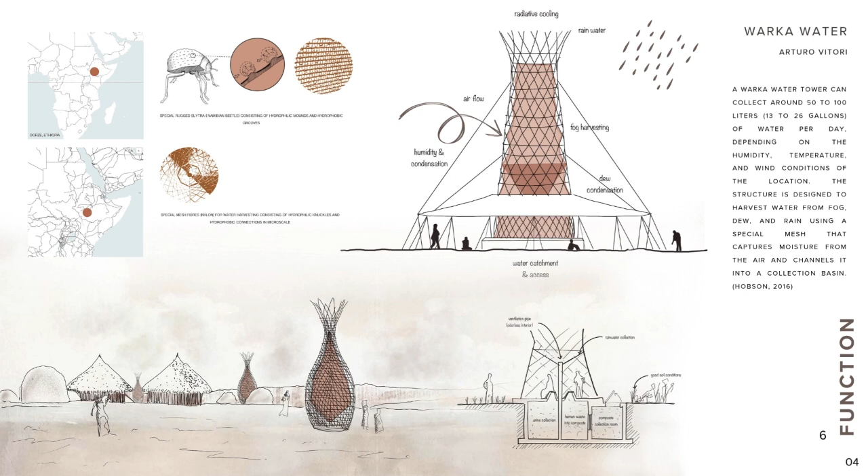So let's take a look at the precedents. The first precedent takes place in Dorze, Ethiopia, called Warka Towers. This is inspired by the fog beetle shell, which mimics its hydrophilic and hydrophobic properties to efficiently capture and store water from the air, offering a sustainable solution for water scarcity in arid regions.

The second precedent takes place in the south of Iran. Concave roof structures serve as a very powerful precedent, coalescing raindrops and standing as a constant visual reminder of water harvesting through their prominent designs.

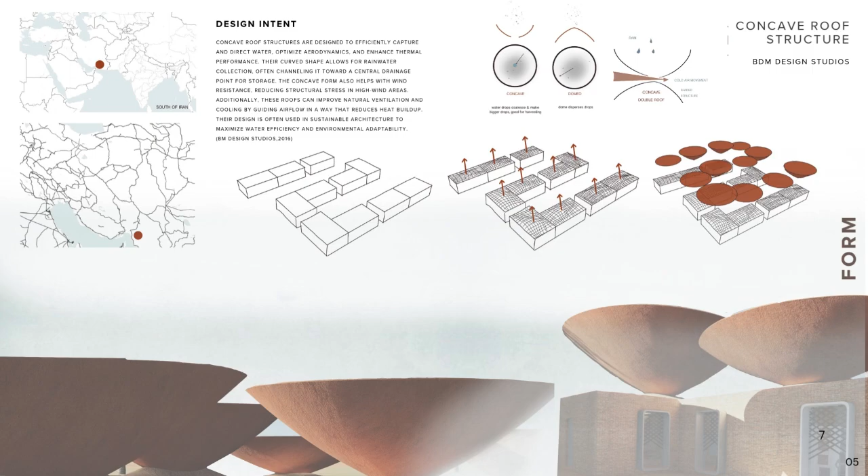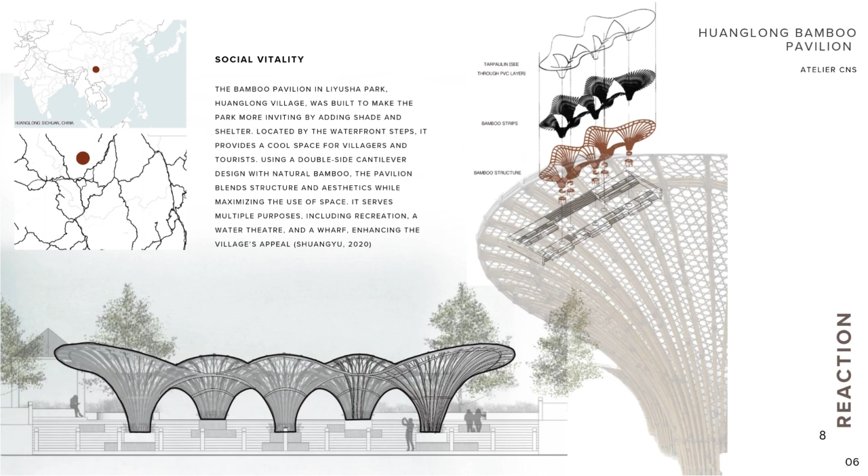And the last precedent, called the Bamboo Pavilion in China, revitalized the waterfront space with its striking structure, fostering social vitality and drawing people in through its unique and inviting design. These three precedents highlight the integration of sustainable water harvesting through innovative design, the visual impact of water conservation, and the power of architecture to foster social vitality and human connection to the environment.

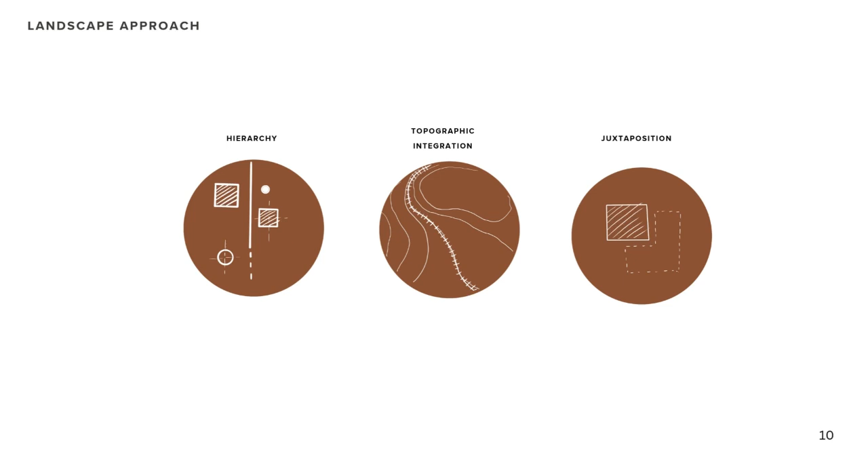Landscape approaches: my landscape is informed by three main strategies. Hierarchy—this shapes pathways through scale, program, and the emotions they evoke. Next is topographic integration, addressing infill and cutout to blend with the terrain. And lastly, juxtaposition, exploring contrast not only in materials but also between humid and arid conditions.

The pathways are divided into a hierarchy. Primary paths are informed by axial linkage. They transect the site, unifying it with adjacent spaces and existing zoo pathways. The curved design of the roads blends seamlessly with the site's topography and existing paths.

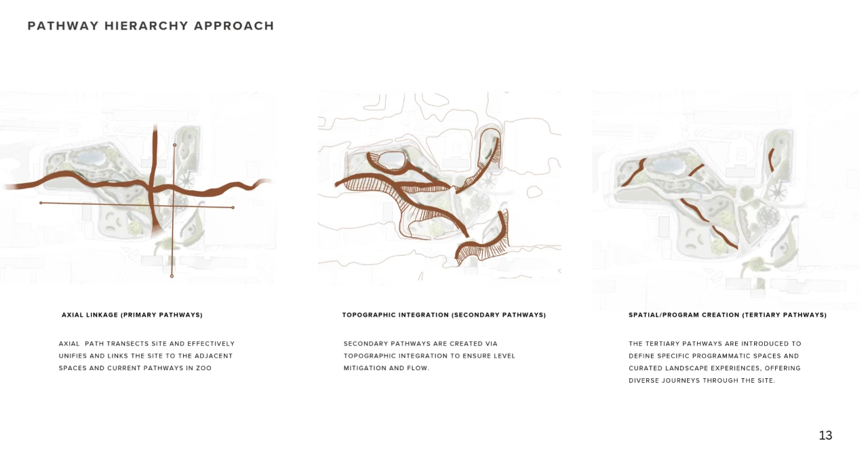Topographic integration harmonizes with the landform. Lastly, tertiary paths divide spaces to define and support the program. Here is a collective depiction of all paths and programs.

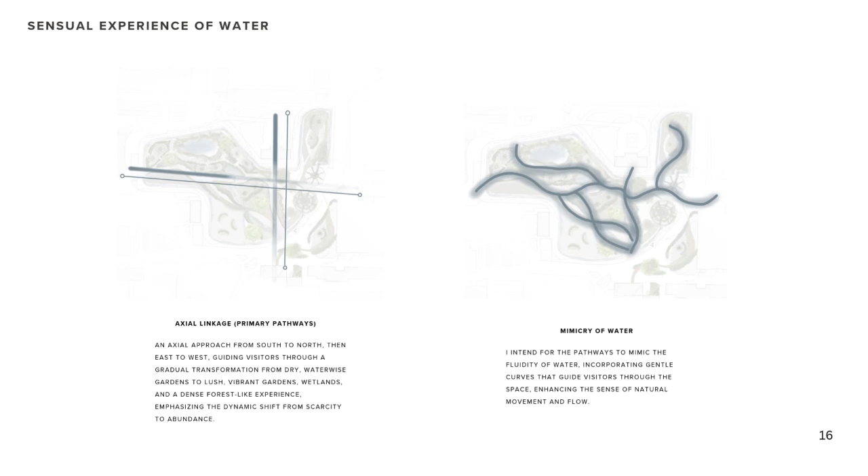Next, we'll look at how water also informed the layout of the landscape. The pathways follow an axial route from south to north and east to west, guiding visitors through a transition from dry gardens to lush, vibrant landscapes, symbolizing the shift from scarcity to abundance. Gentle curves also mimic water's fluidity, enhancing the natural environment through the space.

I intended to create a constructed wetland. The largest benefit of a wetland is its role in enhancing biodiversity and water management. This was also a topographical choice, as the wetland occupies the site's lowest point, historically also serving as the elephant's water hole, making it a natural and fitting location for this feature.

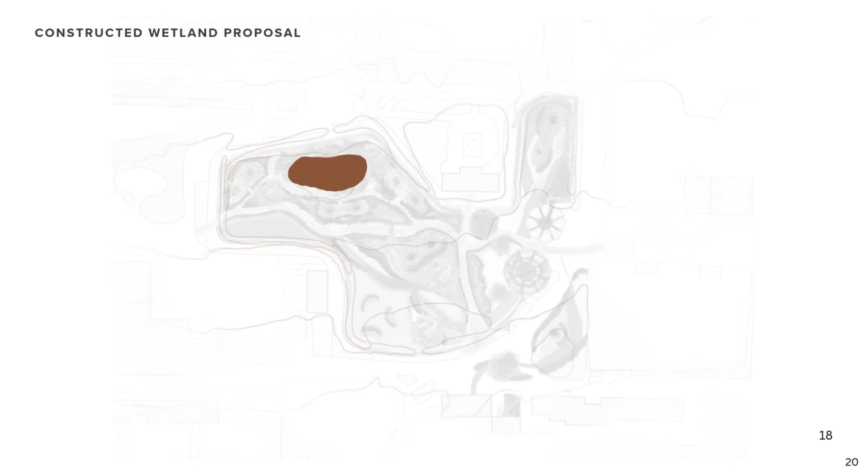I've selected 6 main plants for the wetland. They all share key characteristics in their ability to support diverse wildlife. These plants provide crucial habitat and nourishment for a range of animals, including birds, insects, and small mammals, by offering food sources like seeds and nectar, as well as shelter. Their presence enhances the wetland ecosystem, attracting species that thrive in these rich biodiverse environments, furthering the site's ecological vitality.

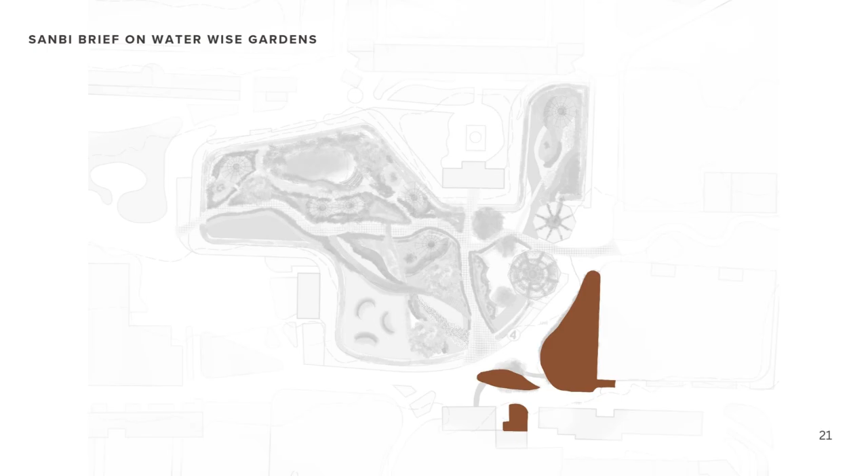The 3 water-wise gardens were designed with low-maintenance plants like aloes and succulents, chosen for their resilience and ability to attract wildlife. The ground will be covered in pebbles to further reduce water usage and maintenance. These gardens are then rated out of 5 based on their height and sun exposure, with calculations provided to guide plant selection.

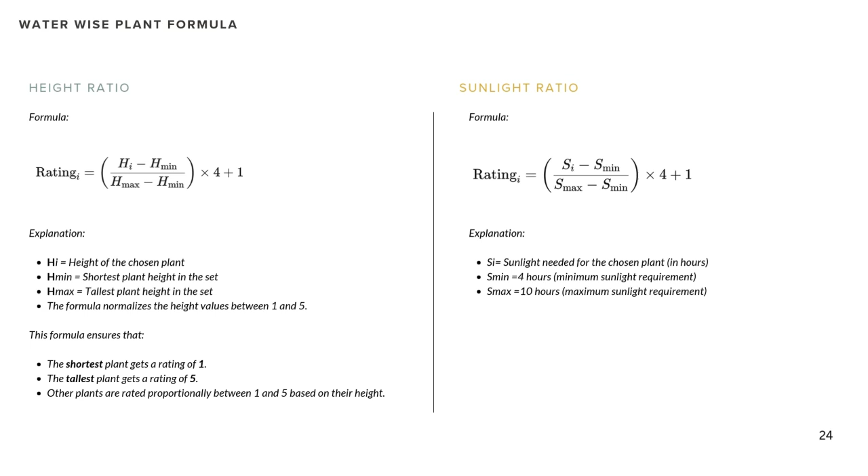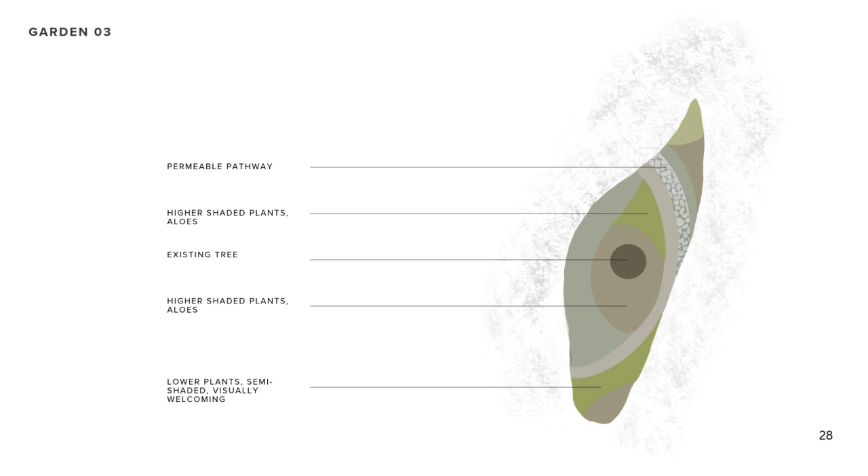Higher plants are placed towards the back of the gardens to create depth and allow unobstructed views for the shorter plants in the foreground. A shadow study was conducted to ensure optimal placement, and the layout correlates with the main site design, ensuring each garden's placement complements the overall structure and enhances ecological flow.

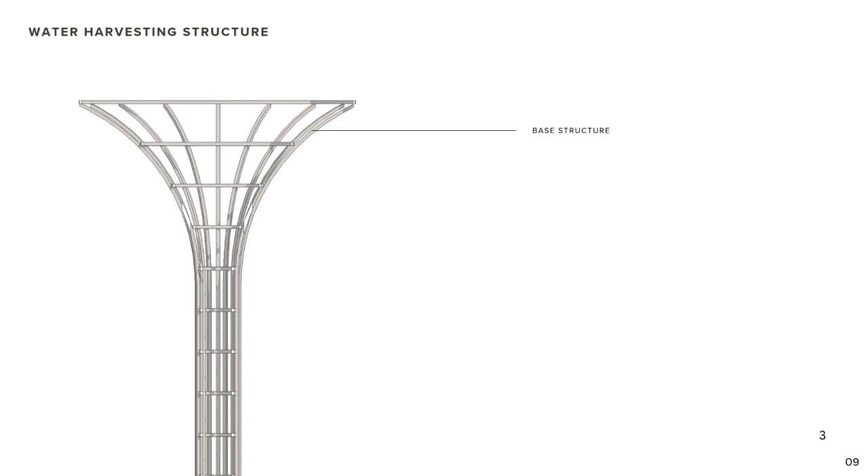The water catchment structure is designed to draw inspiration from precedents, serving both as functional water collectors and subconscious reminders of the importance of water. The base structure, designed for visual appeal, will allow the application of specific parametric designs, which we will see later.

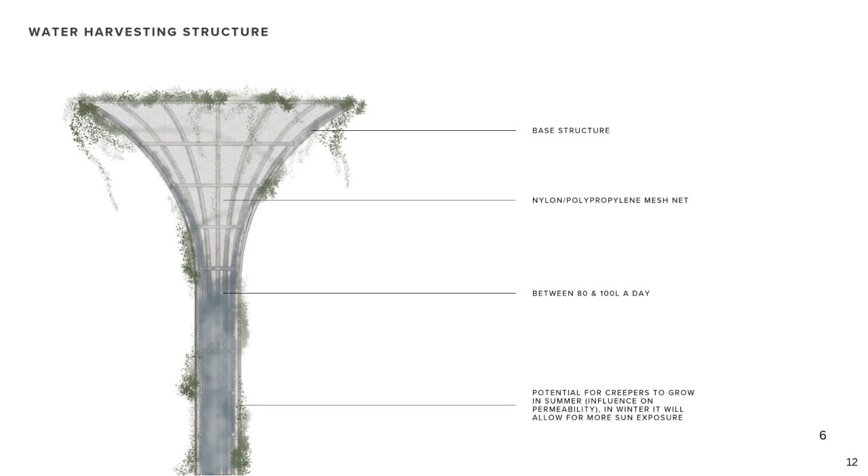Nylon mesh nets will be added to the structures near the wetlands, providing support for creepers to grow, which will attract biodiversity. This design responds dynamically to the seasons, with plants degrading in winter to allow more sunlight. As seen in previous precedents, the structure will have a positive social impact, drawing people in with its interactive and evolving nature.

These parametric designs are inspired by various elements, including the forms of leaves and flowers, African drum rope patterns, and woven baskets, creating a unique blend of nature and cultural references.

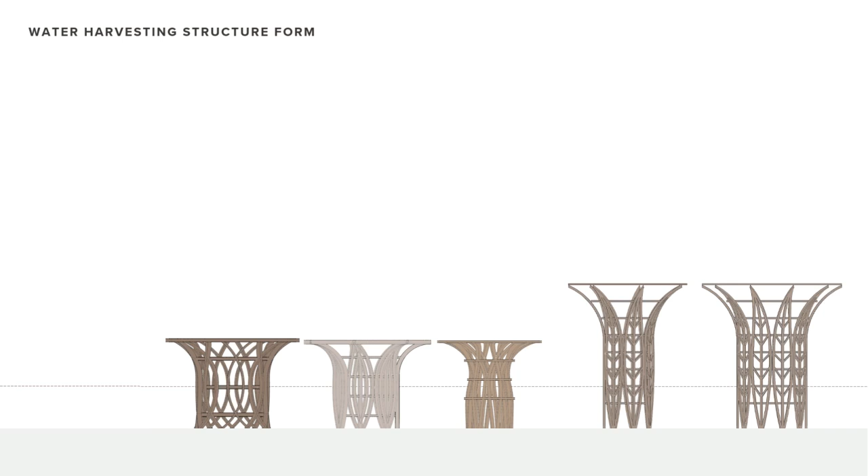All elements of the design maintain a concave form to maximize water collection, channeling rainfall into the structure's center and ensuring efficient retention and flow, while reinforcing the visual and functional relationship to water conservation.

The placement of these structures is strategically aligned with the wetlands, where increased water vapor and airborne moisture enhance their ability to collect the maximum amount of water particles on site. These structures will have nylon mesh to capture as much dew and air vapor as possible.

A higher density of structures is placed in this area, marking the lowest point on site, which helps significantly to reduce water runoff and flooding by capturing and managing excess water.

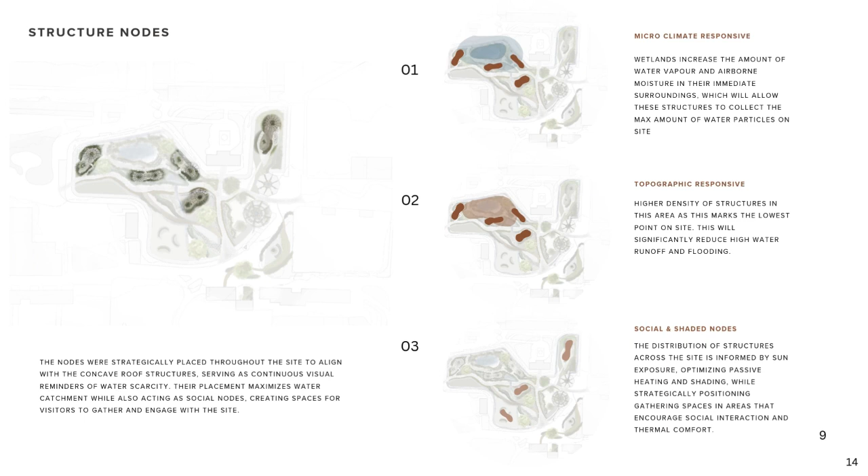This distribution of structures is guided by sun exposure, optimizing passive heating and shading, while placing social nodes in areas that promote interaction with thermal comfort.

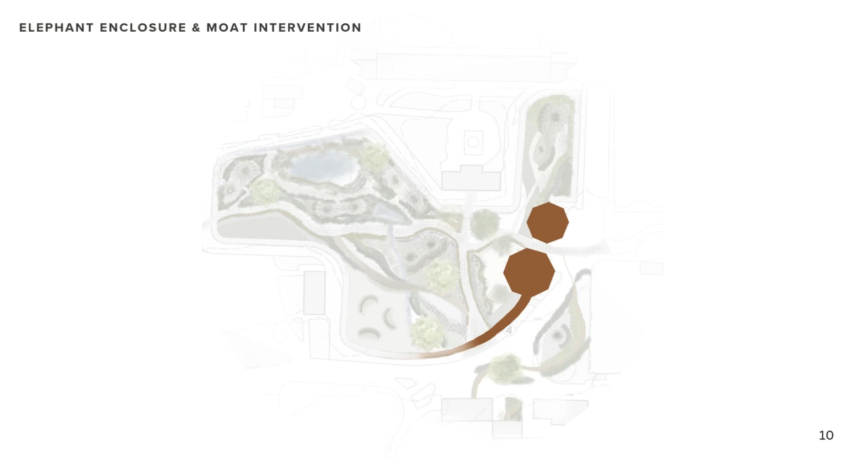Water collected will be channeled above ground as visual reminders and underground into French draining systems, which filter and purify water before directing it to the wetlands or repurposing it for irrigation. This integrated approach promotes sustainable water management while educating users on the critical value of water in maintaining environmental balance.

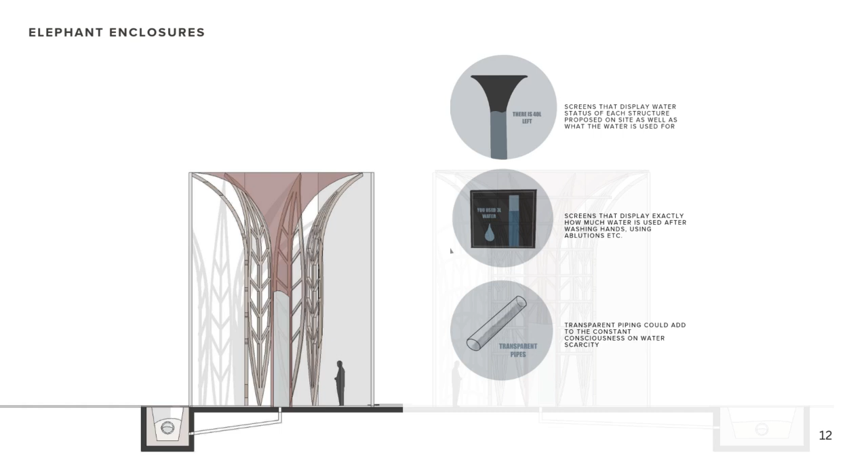Screens will display the water status of each structure, showing usage details such as hand washing and ablution consumption, while transparent piping enhances awareness of water scarcity.

The structures, including the elephant enclosures, bioswale, French drain, and wetland, will collectively capture approximately 338,000 litres of water per year, water that was previously not captured.

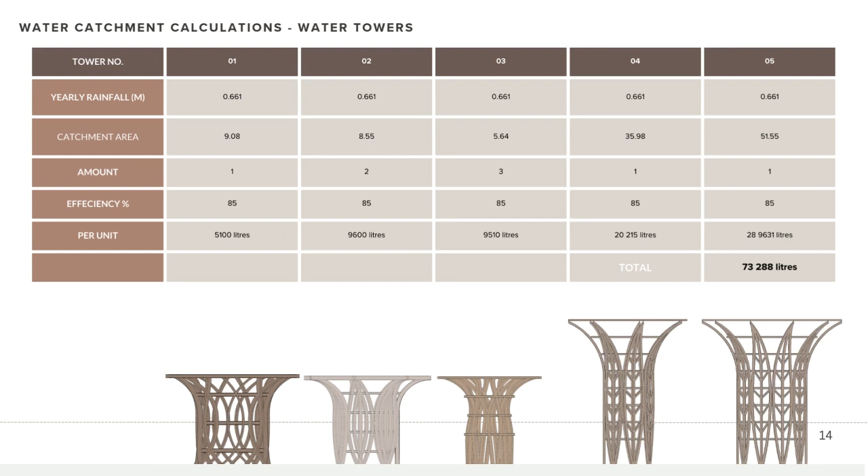To put this into perspective, this amount could irrigate around 135,000 square meters of garden, or provide approximately 338,000 hand washings. Additionally, it could flush a toilet about 42,000 times.

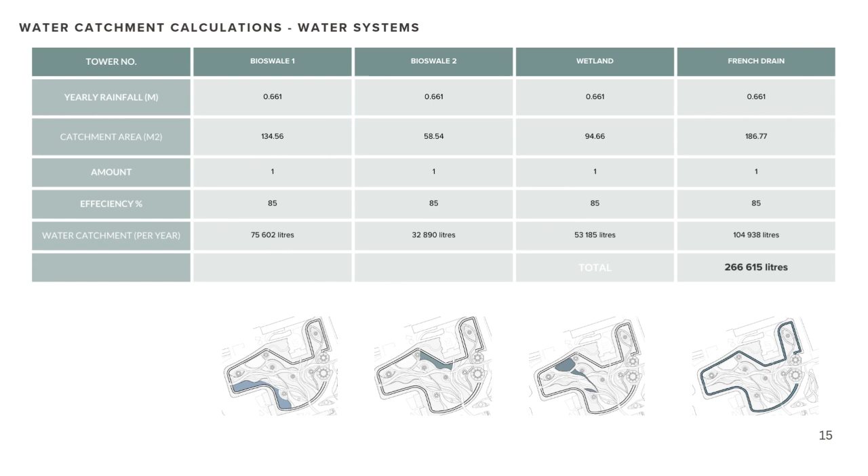The water collection plan illustrates the various proposed water systems on site, including the primary harvesting structures, bioswale, French drain, and wetland, highlighting how each system can contribute to efficient water capture and management.

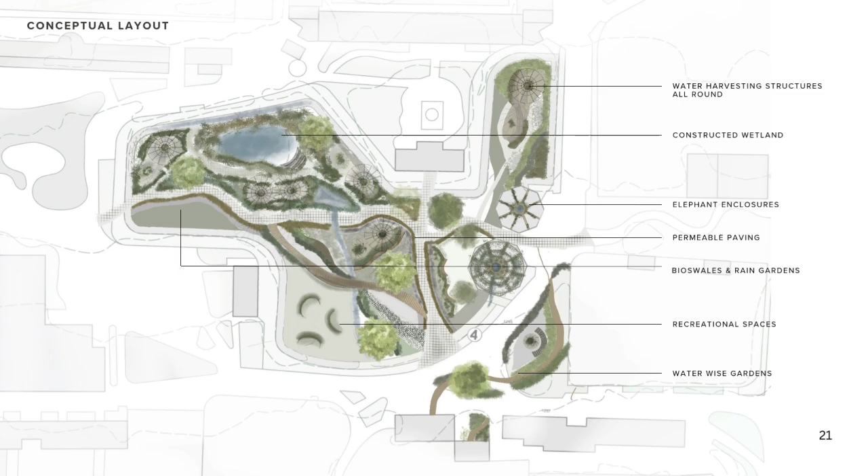Lastly, this is the final concept: integrating pathway approaches, sensory experiences of water, and structural catchment strategies into one cohesive concept, and thereafter, the final plan.

By seamlessly blending architecture, landscape, and water systems, my design not only creates a visually and sensory stimulating journey, but also embeds a deep, lasting connection to the critical importance of water conservation.

Through this immersive experience, visitors are not only educated, but also inspired to take action, fostering a collective sense of responsibility for preserving our most vital resource.

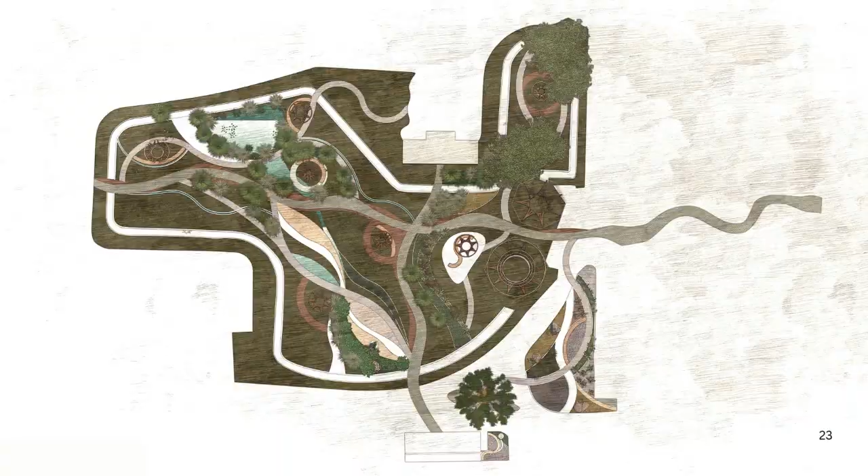As they move through the space, the stark contrast between scarcity and abundance serves as a powerful reminder of the impact our choices can have on the environment, ultimately driving a shift towards more sustainable, water-conscious living.

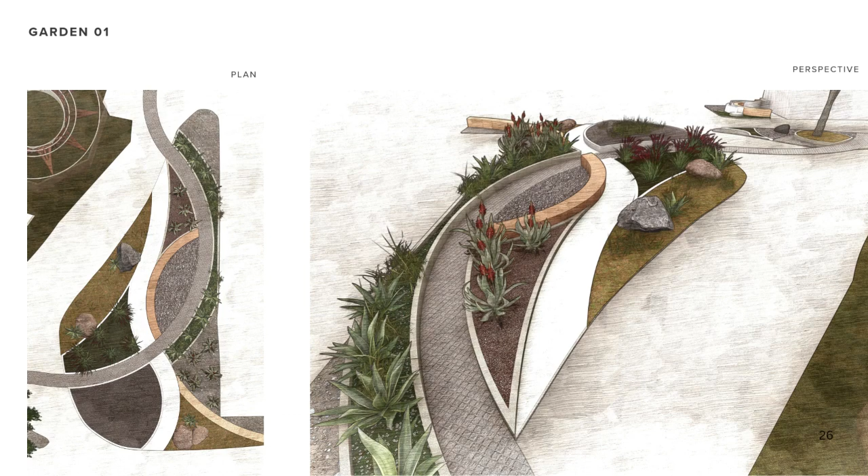Looking at the final perspectives, one can see that the experience begins with tactile sensations of cracked earth underfoot, the oppressive dryness of the air, and the palpable tension of scarcity.

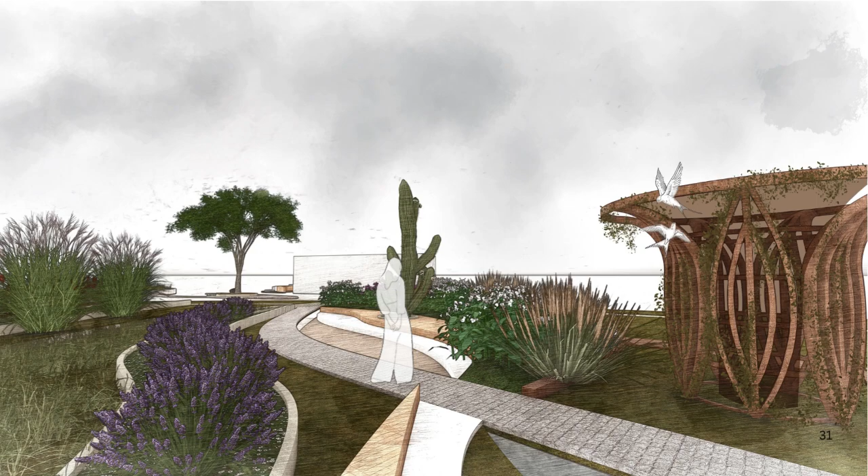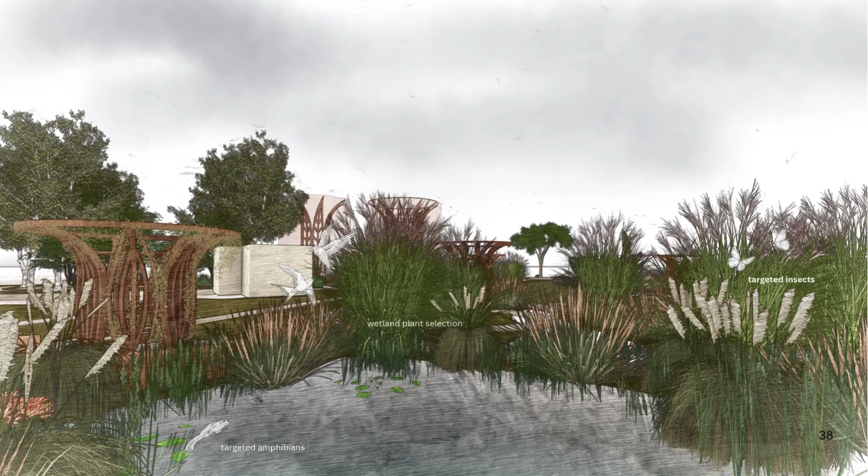As visitors progress, they are gradually enveloped in increasingly moist, mist-laden spaces, leading to an immersive, sylvan environment abundant with lush vegetation. Through shifts in sound, texture, and temperature, such as the echo of dripping water in arid surroundings, and the transition from rough, dehydrated to smooth, water-infused surfaces, the design amplifies the emotional impact of water's rarity.

This progression from drought to abundance fosters a sense of hydro-gratitude, encouraging visitors to reflect on the fragility of water and inspiring sustainable practices in their own lives.